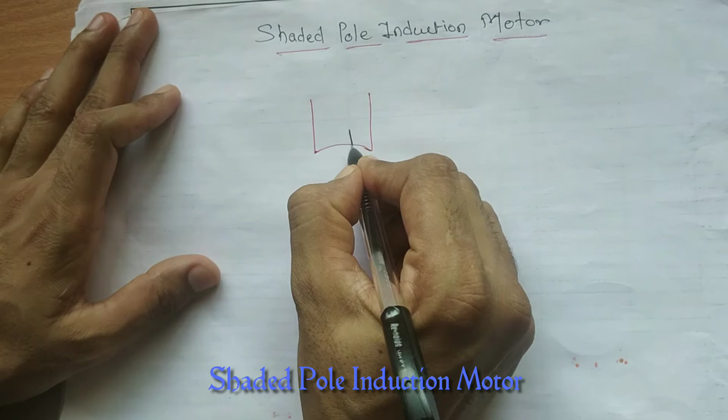Salient pole structure. Now in a shaded pole induction motor, what they have done, I'll tell you later why, but at 1/4 or 1/3 portion of this pole, they are going to cut it. They means the manufacturer. They cut it and make it like this. This is the structure of a shaded pole.

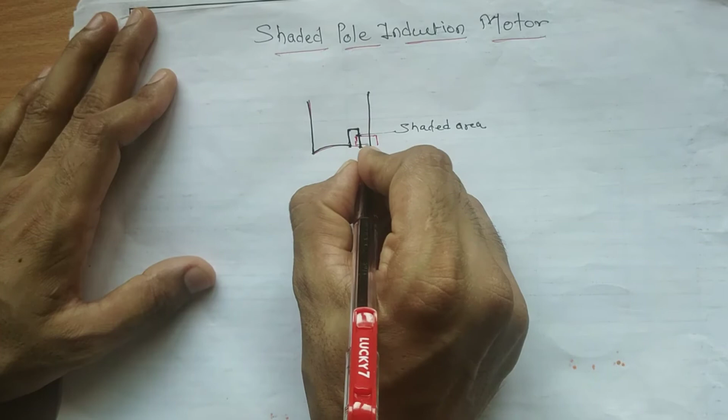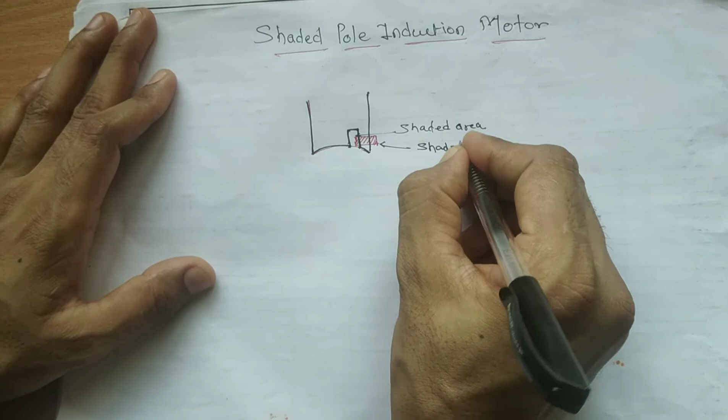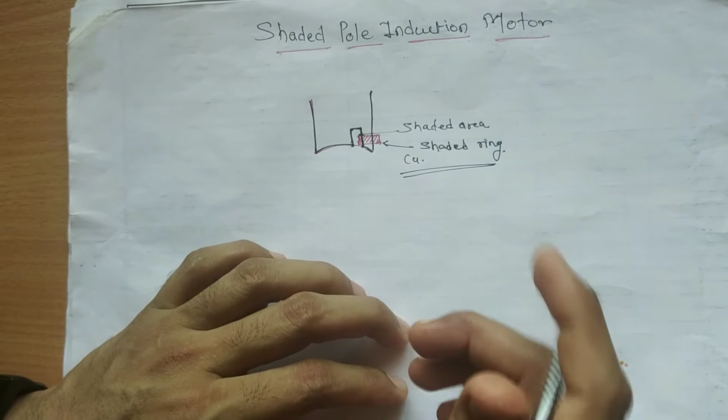Now this portion or area, they call it the shaded area or shaded portion. And what they have done, they just put inside this portion one thick copper ring. This copper ring is given a name: shaded ring, shaded copper ring, or copper shaded ring, whatever you can say. Now this ring, they fixed it over in this area.

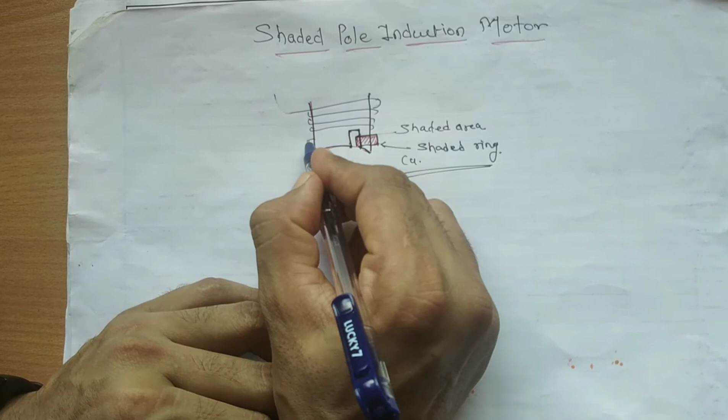Again, over this pole there is a winding. There is, you can say, a single phase winding like this. We already learned about this winding, right? Now this pole which is over the stator, everyone knows what exactly the stator is, right?

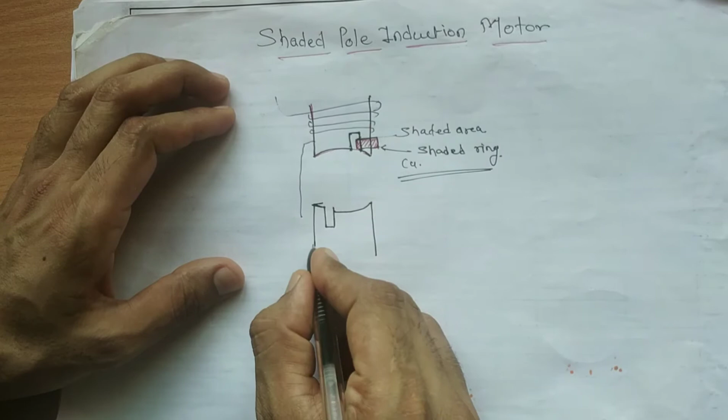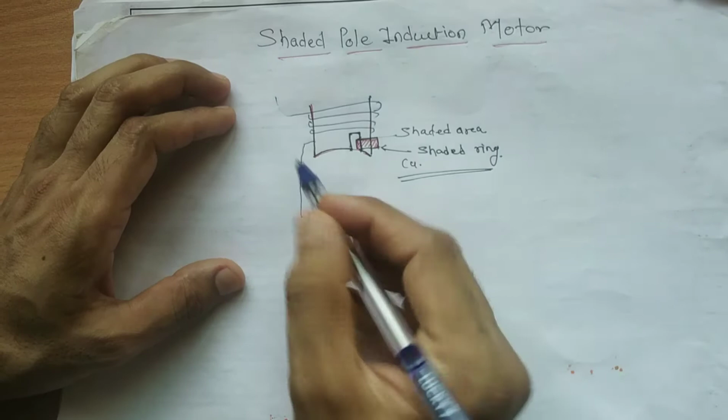And there is a second pole like this, second pole here. Okay, make it like this. Again here they put a copper shaded ring and the winding over this pole like this.

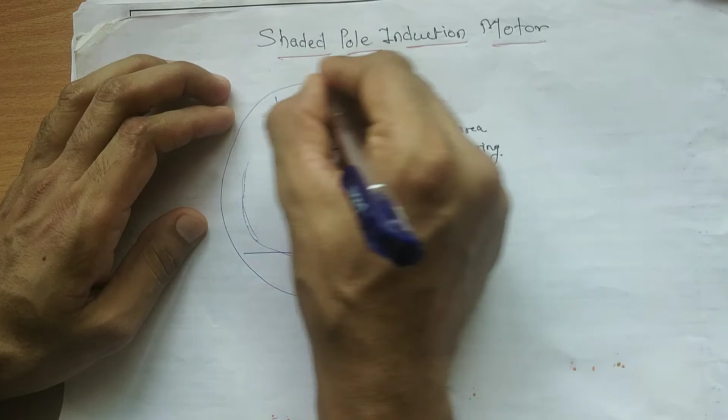Now suppose this pole you have to connect to the stator like this. You can make a circle. Now this you have to connect across the single phase AC supply, across these two terminals. And in this area what you have to fix or put? Simple, rotor. What kind of rotor? Again, squirrel cage rotor.

Now this is the constructional diagram of the shaded pole induction motor.

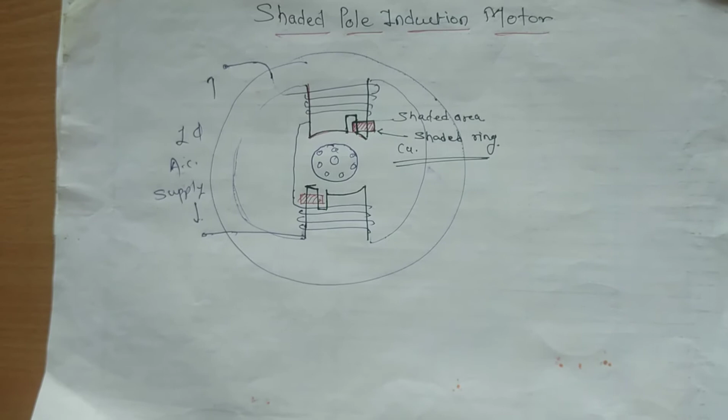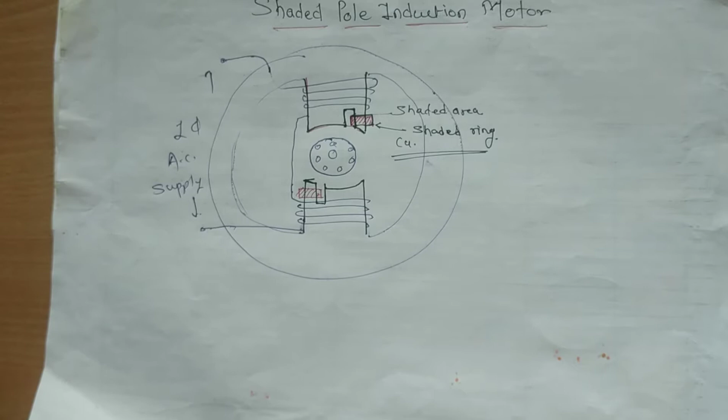See, when you are writing the construction part, in a simple way you have to write it down. First you have to write down stator pole, stator winding. When you write down stator pole, the pole is constructed as a salient pole, and what kind of material we use, which is silicon steel stamping, and which is laminated, of course.

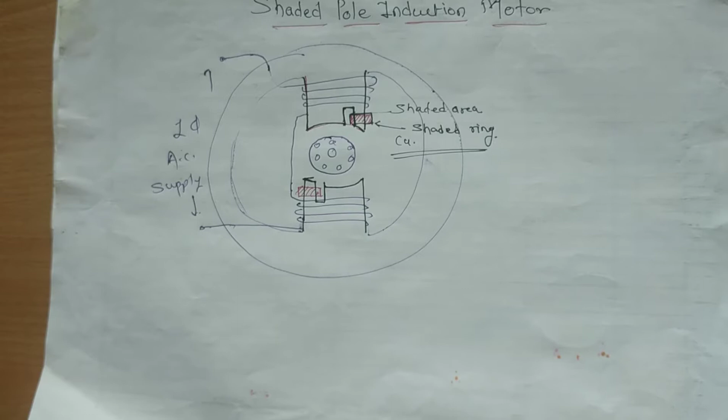Then there is a shaded area or shaded portion available over the pole, right? And next you have to write down about the shaded ring. Then in this area we fixed one thick copper ring in this shaded portion, right? So this ring we call the copper shaded ring, or only shaded ring, you can say.

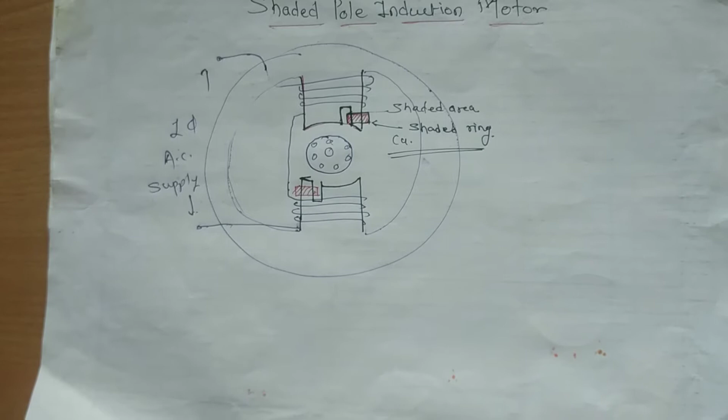Then over the pole you have to just do a winding. What type of material we are using for the winding? Which is enameled copper, which is single phase winding we have done. Then next, rotor: simple squirrel cage rotor we are using for this motor. Okay, so this is the construction part.

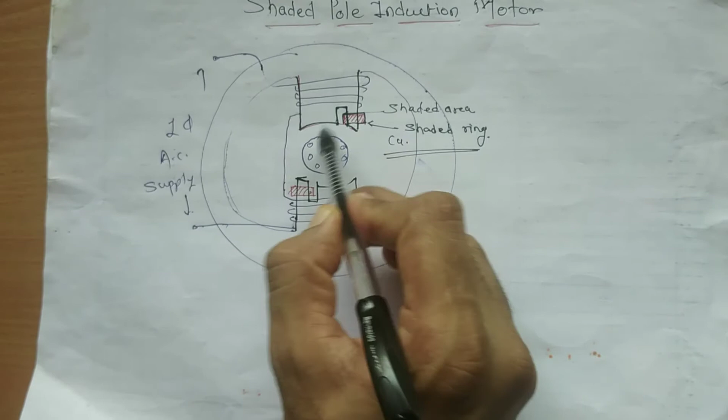See, this shaded pole, or this pole which is cut over here, the overall portion - from the overall portion, 1/3 or 1/4 portion, till 1/3 or 1/4 portion we are going to cut it, right?

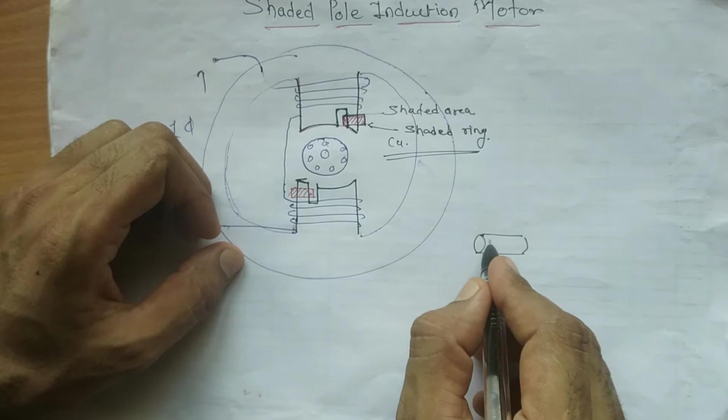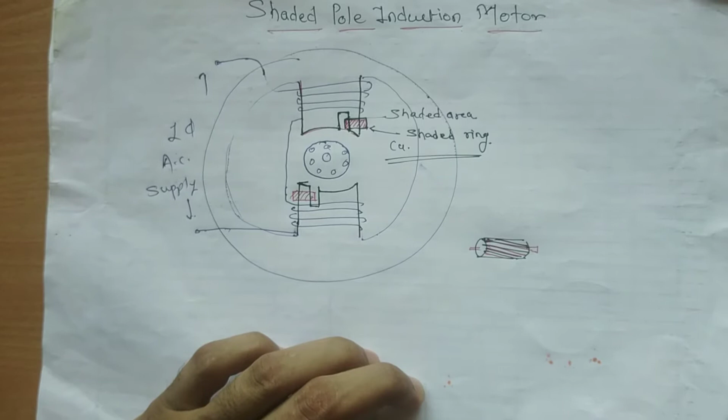This is the rotor available for the shaded pole induction motor. And the air gap between your pole and the rotor has to be maintained 0.25 to 0.5 millimeter. I am repeating again, the air gap has to be maintained from 0.25 to 0.5 millimeter. It means uniform everywhere - if you are taking 0.25, you have to make it uniform everywhere.

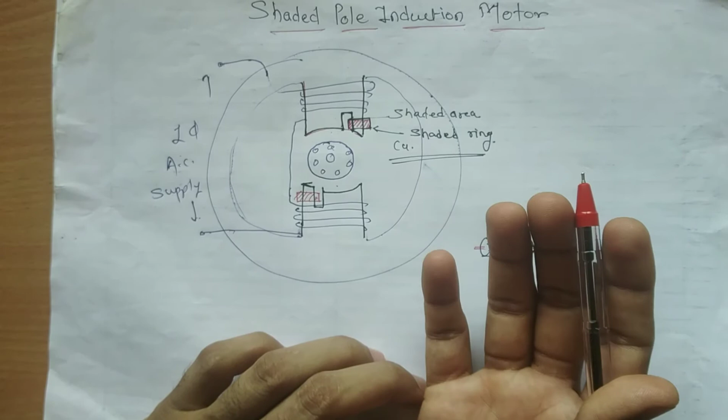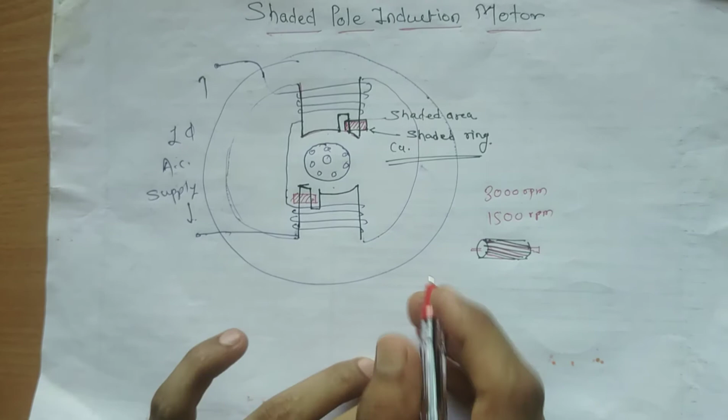So 0.25. Okay, the poles can be 2-pole or 4-pole; shaded pole induction motors are generally available as 2-pole motor and 4-pole motor. So the speed generally we get is 3000 rpm or 1500 rpm motor is available. Okay, so these are the general constructional details of this shaded pole induction motor.

Okay, let's move forward.

We'll see the working of shaded pole induction motor. Now pay attention properly how the shaded pole induction motor exactly works.

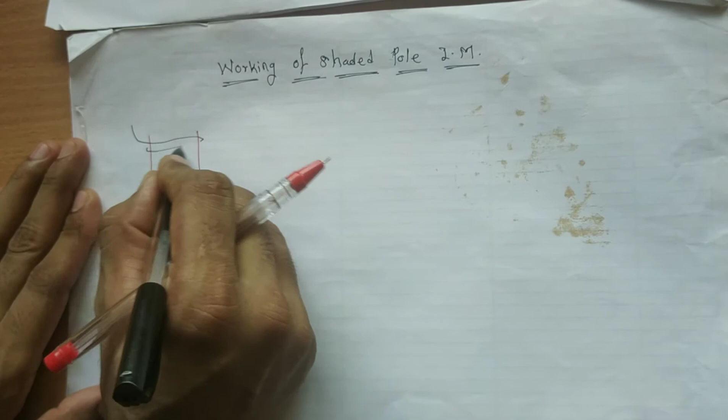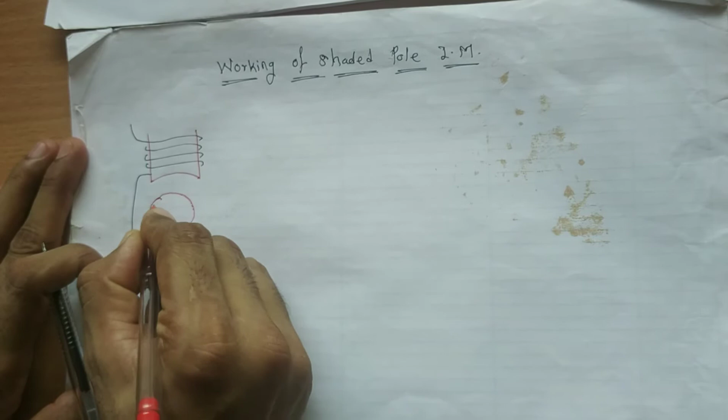See, first there was a pole like this. This pole I can draw like this. Here there was a pole, and that time we do winding over this. Everyone knows how the single phase induction motor is constructed, I'm just giving you a short brief. And there is again a rotor, one rotor, which is squirrel cage rotor.

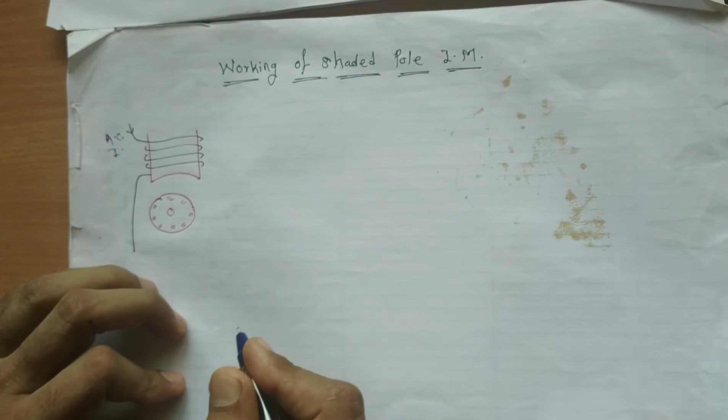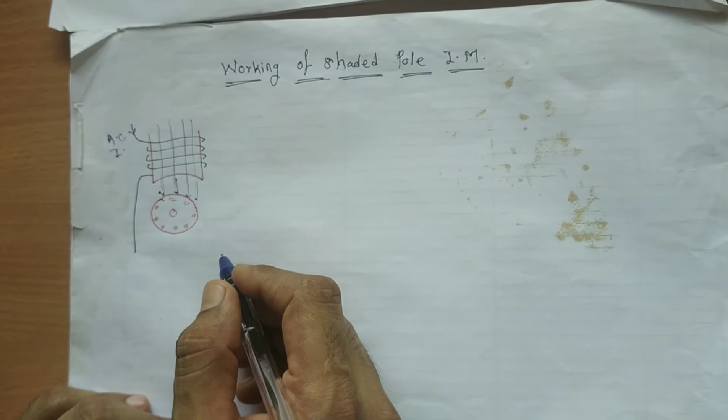Now see what happens when the current started flowing through this winding. That current is AC, alternating current, and it will produce the same nature of magnetic field, which is an alternating magnetic field in this area, evenly flowing from the surface of the pole towards the rotor. But this fluctuating or alternating magnetic field is not at all a rotating magnetic field, and that's why your single phase induction motor was not self-starting, which we have already learned.

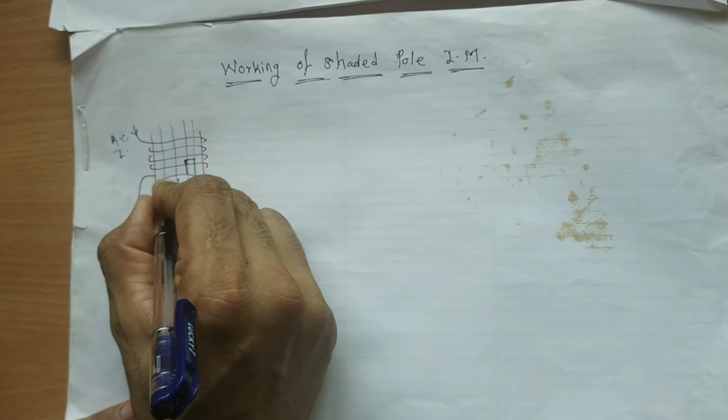But here what they have done, they just cut this portion like this. They cut here 1/3 or 1/4 portion, and they put a copper ring, you can say a copper shaded ring. Here they put a copper shaded ring.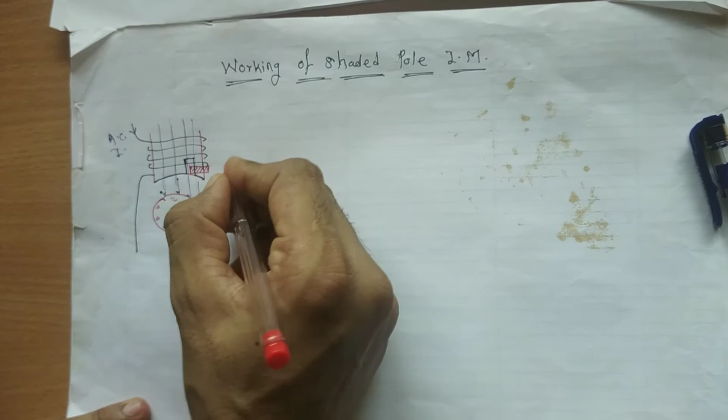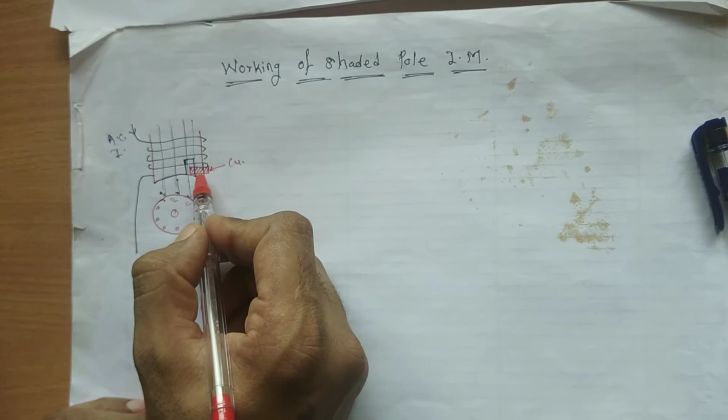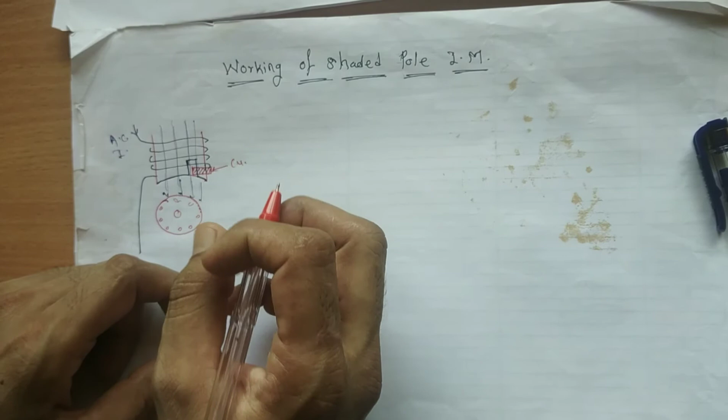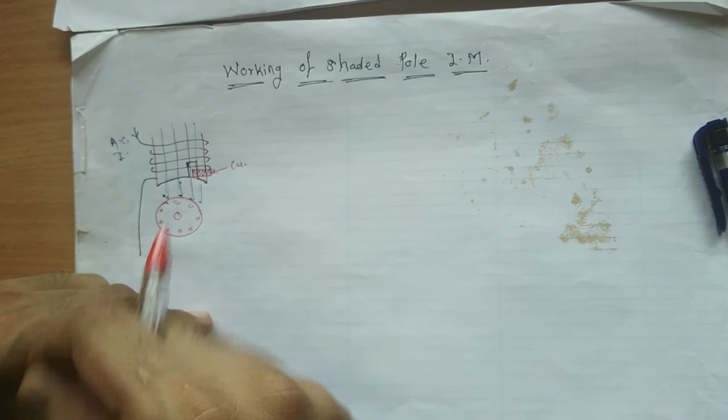And just because of that, what is happening here? Now pay attention. This ring I am putting inside the changing magnetic field. Now everyone knows Faraday's law. When we put a conductor in a changing magnetic field, it will cut that magnetic field, so an EMF will induce inside this copper ring, and current started flowing through it, which has the same nature, but by Lenz's law, has some opposing nature. Lenz's law says it will oppose the cause of its production. Now because of that, what exactly happens and how this motor works, this we will learn.

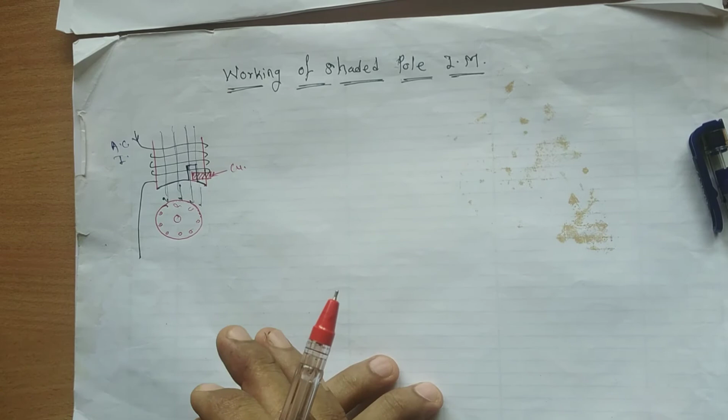Now see, next I'll tell you step by step. Three instances are there, I'll explain you. Okay, just stay with me.

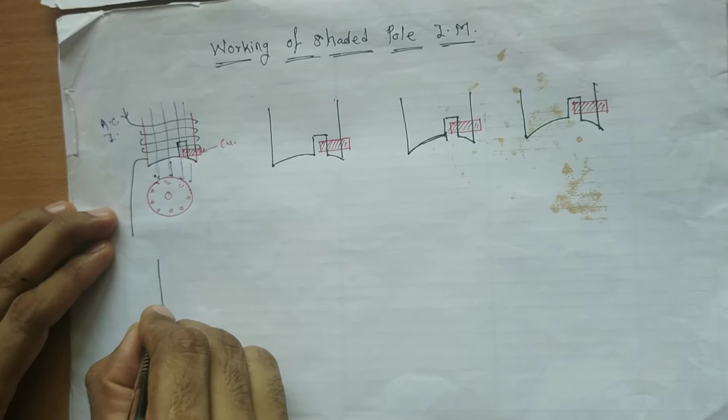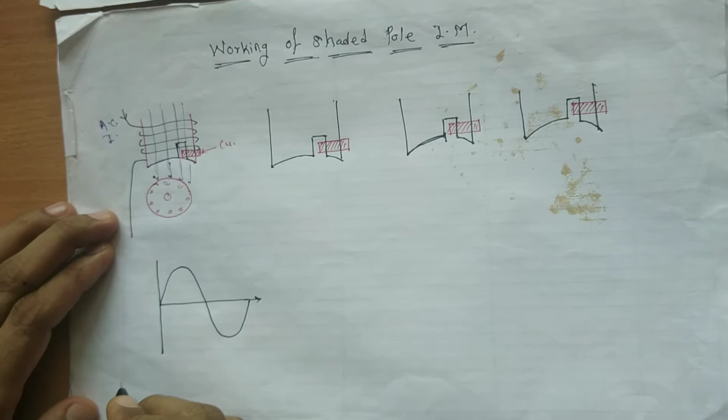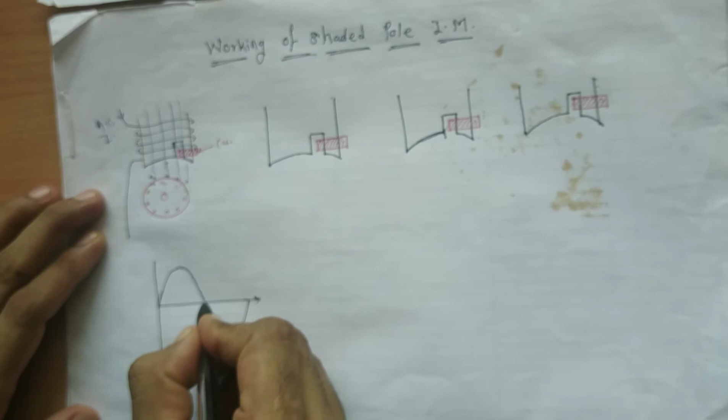Now see here, I draw some diagrams of this pole. Three diagrams I draw, and here I will again draw one AC waveform, sinusoidal waveform, everyone knows, right, alternating waveform. See, like this. Now see, this is the one cycle. There is a 50 cycles per second alternating current, but here I am just showing you one simple cycle, and will take one half cycle only to explain.

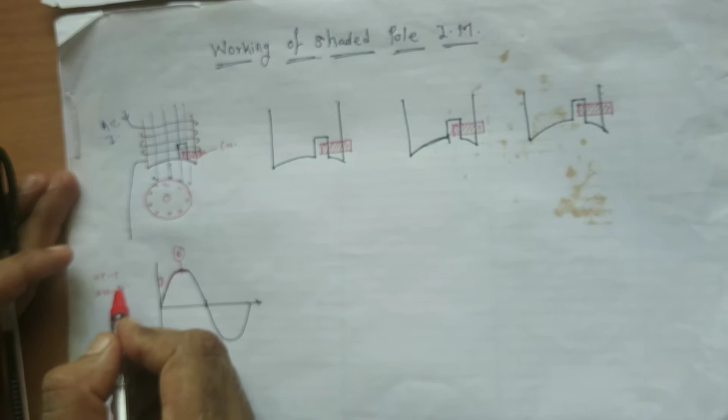Now in this half cycle again, there are three instances I can show you. There is an increasing instant, this is the increasing instant, first instant. There is a second instant, which is constant instant, or equal number of increasing quantity and equal number of decreasing quantity. You can say plus 5 minus 5, or plus 10 minus 10, so which is nothing but 0 only. Here there is a third instant, which is decreasing instant.

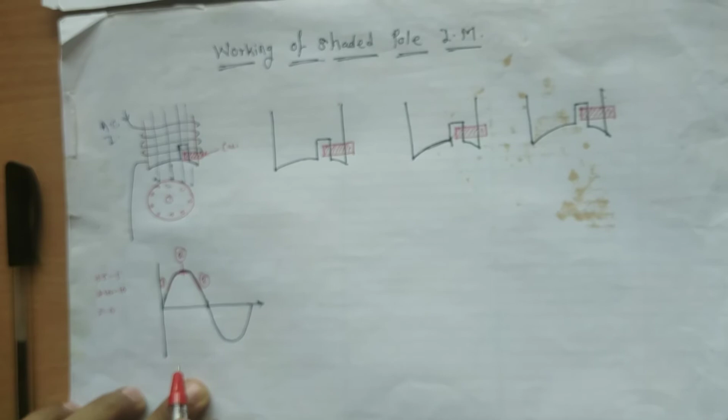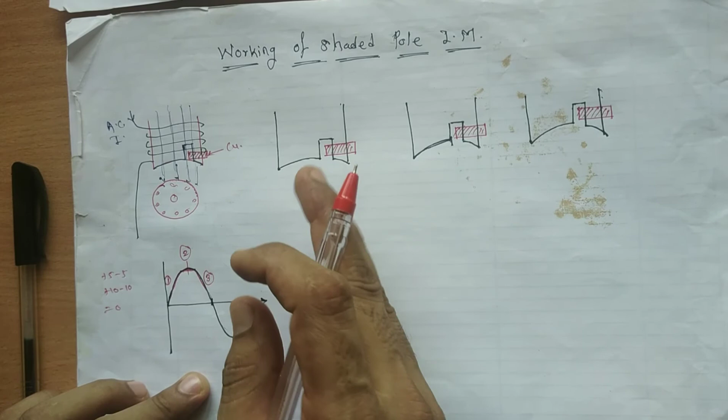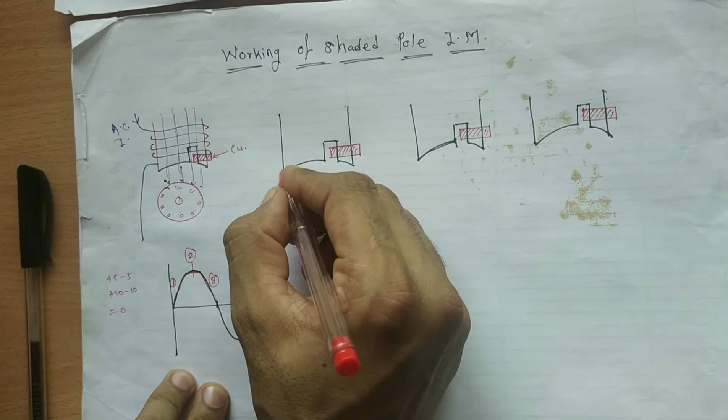Now for that purpose only, I draw here three diagrams. I will show you instant by instant, three instances, what exactly will happen. Now here at the increasing instant, again I am going to draw here half cycle like this. Half cycle here, there is again half cycle here, there is again half cycle here.

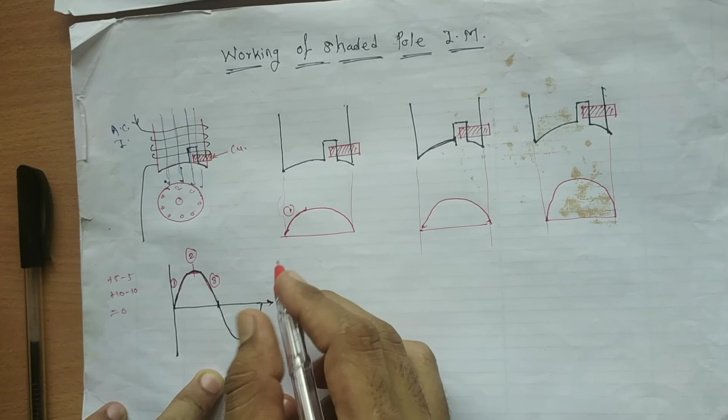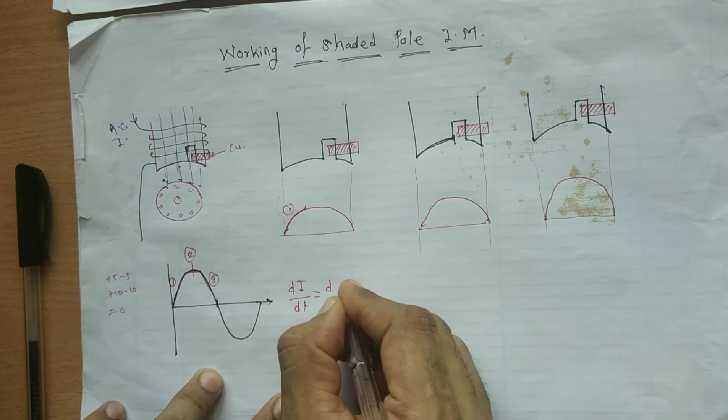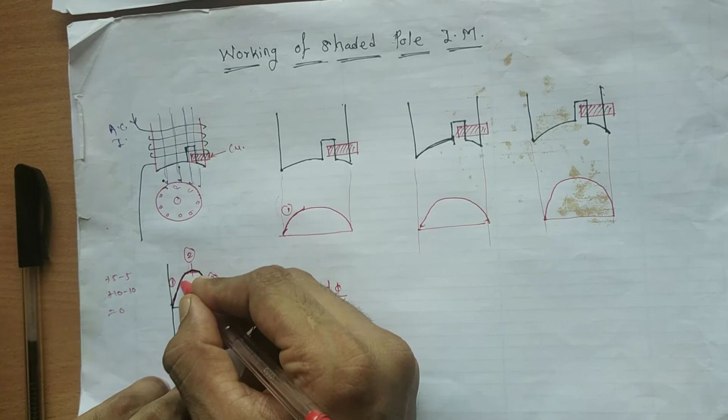Now here, see, at the first instant, there is an increasing quantity. Now this current, which is changing with respect to time, di by dt, and because current is directly proportional to flux, that's d phi by dt - your rate of change of current is nothing but rate of change of flux. Now rate of change of flux here, it is increasing. So because of that, here again I am going to show you some winding. Now because of that, the fluxes are producing over here.

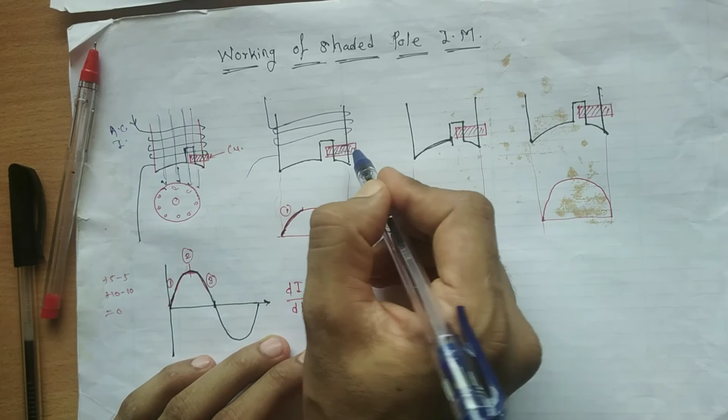See, this is what the increasing rate of change of flux. Here again, because of Faraday's law, the flux will link here and produce an EMF. Again the current starts flowing through this copper ring or shaded ring, and because of that, magnetic flux will be produced by this ring, and this will oppose its cause by Lenz's law.

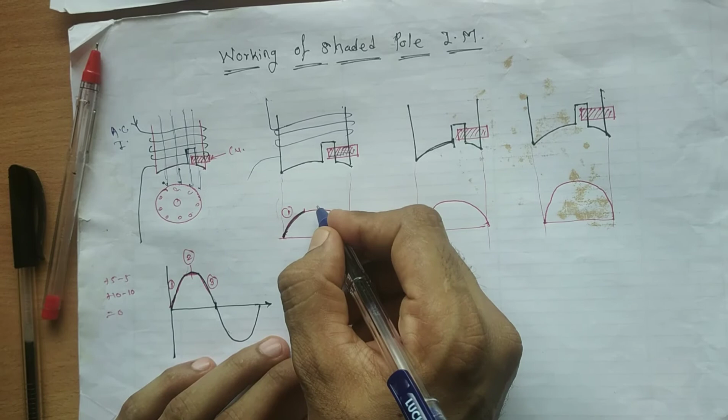What will it oppose exactly? The increasing rate of change of flux, so it will oppose this increasing rate of change of flux. It means the nature of this flux will be opposing to the main flux, it will oppose the main flux. That's why all the fluxes are going to divert.

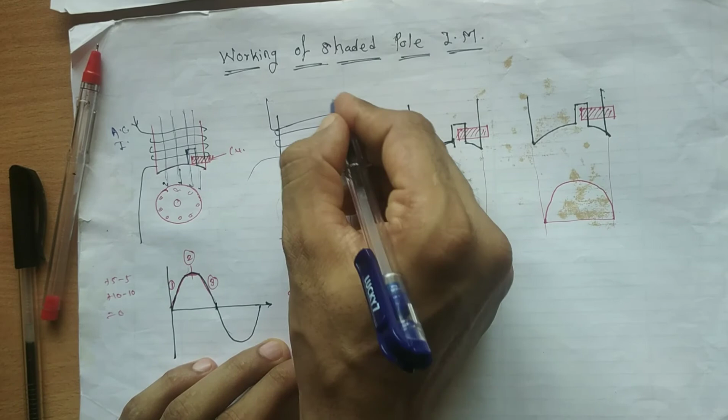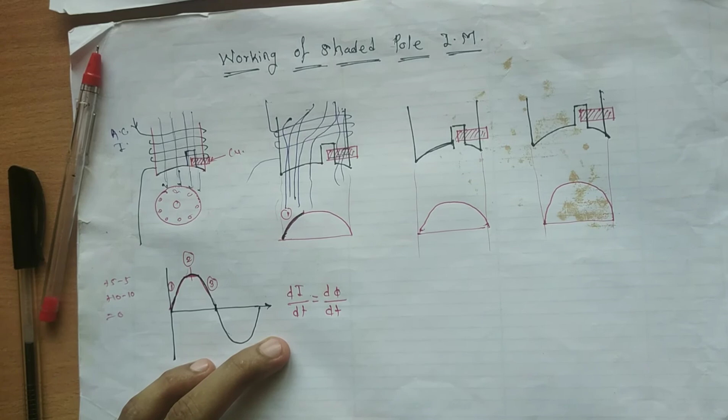The flux gets weak over here and concentrates over here, right? That's why you can say the main flux, or the resultant flux, will be concentrated here, on the left hand side portion of your pole. So this is what happened at the first instant.

Now let's talk about the second instant. In the second instant, again suppose there is a winding like this. This is the winding.

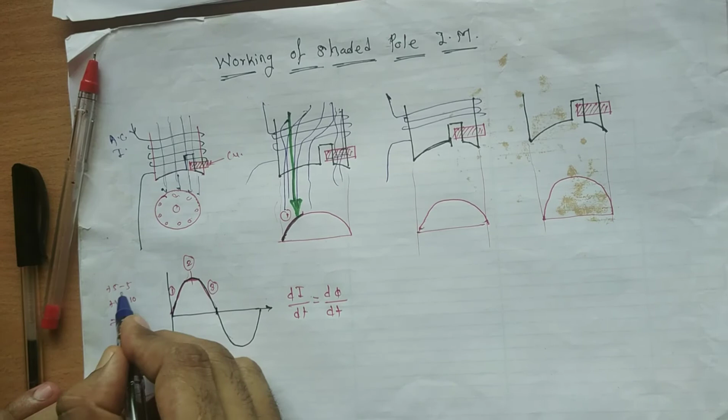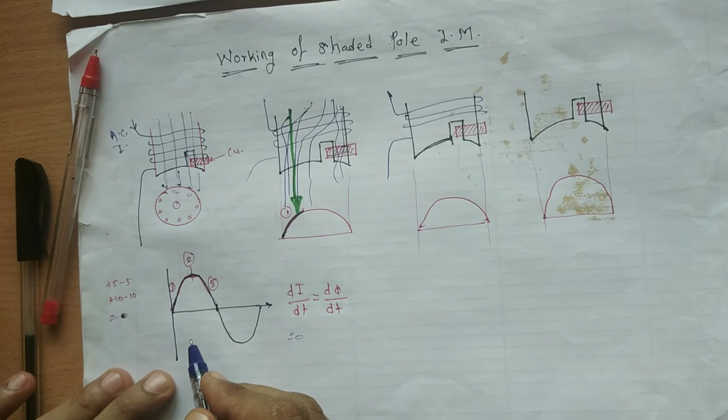Again at the second instant, let me tell you what is happening. There are equal number of increasing and decreasing quantities, which means the rate of change of flux is zero at this second instant. It means nothing is happening.

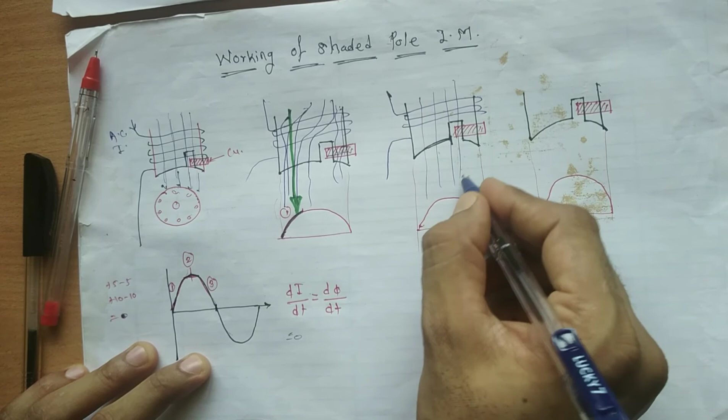At that time this will happen: the fluxes start flowing uniformly through this pole. If you solve the resultant component, then the resultant component will be at the center. This was at the left hand side (LHS), and now this is at the center.

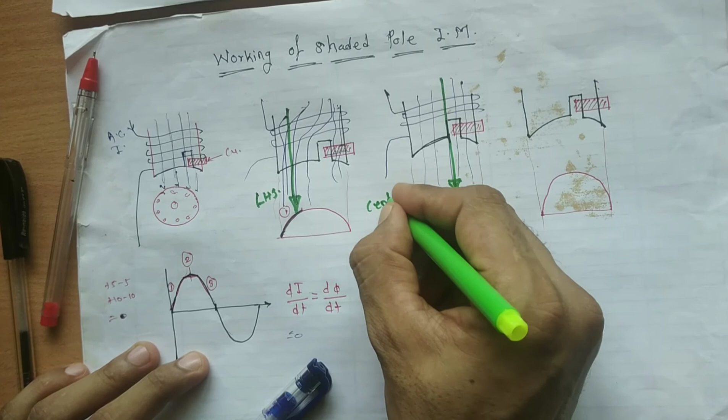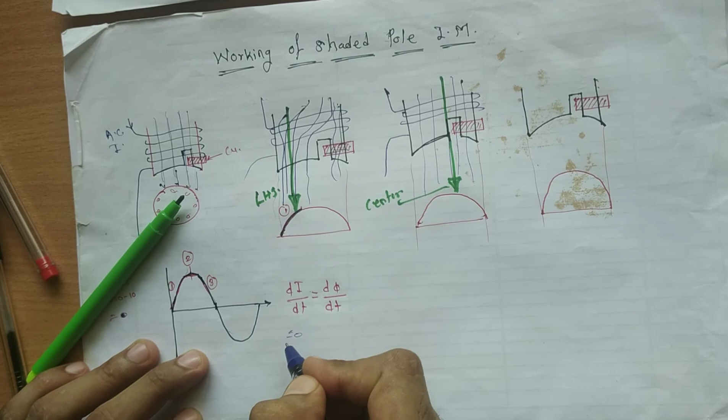Next, third instant. What will happen at the third instant? There is a decreasing quantity, a decreasing rate of change of flux. From here to here, it is decreasing rate of change of flux.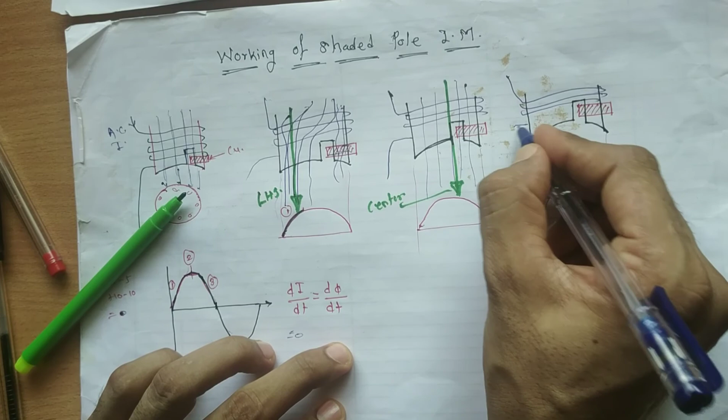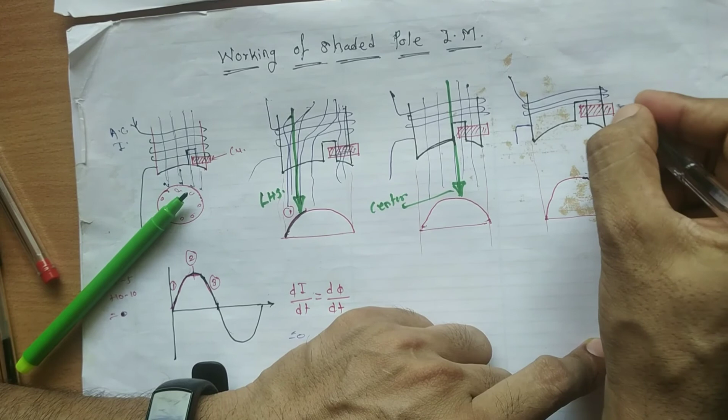Because of that, what is happening? Again, it will oppose whatever flux is produced here in this shaded ring. This will oppose its cause. Now what is the cause? There is a decreasing quantity, a decreasing rate of change of flux. Now it will oppose it, meaning it will want to increase it.

It means all the fluxes are going to concentrate over here. It will produce a lot of flux and the fluxes weaken over here. That's why the main flux, or resultant flux, will be concentrated here.

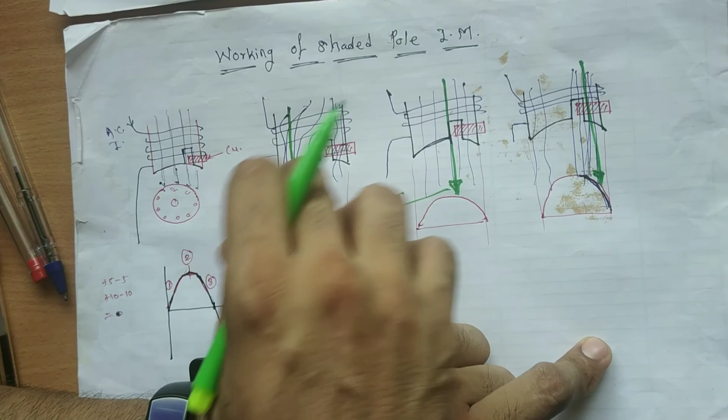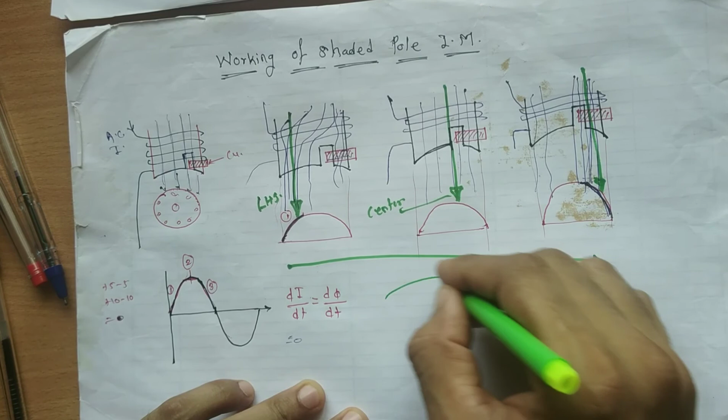If you see from diagrams 1, 2, 3, the flux is actually moving from left to right, or you can say clockwise. You can directly conclude the flux is now moving from unshaded portion to shaded portion.

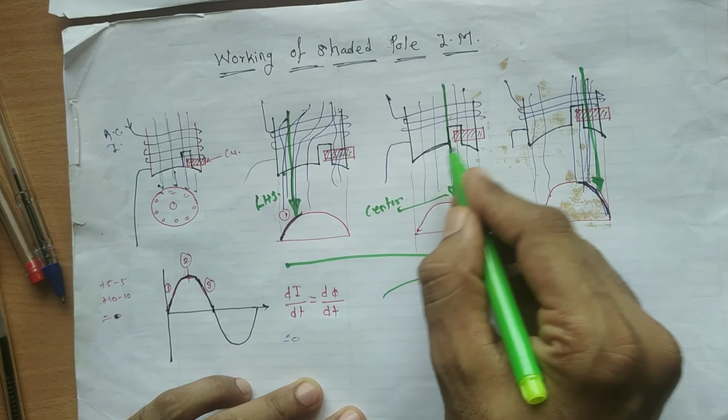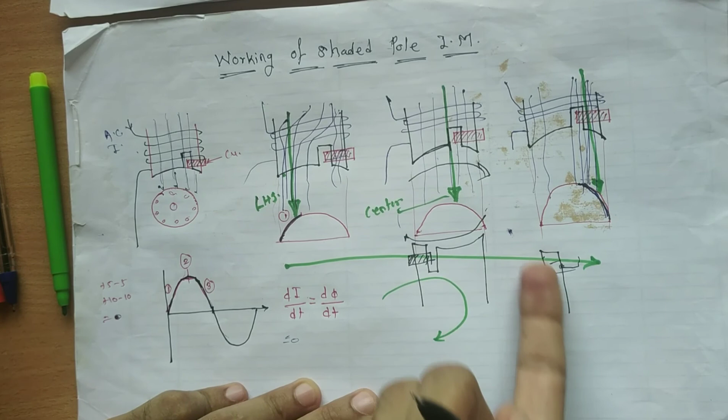If I draw a second pole here like this, with a shaded ring here, then again it moves from unshaded portion to shaded portion. This is how the rotating flux is produced, and this is how the rotating magnetic field, or rotating torque, is produced.

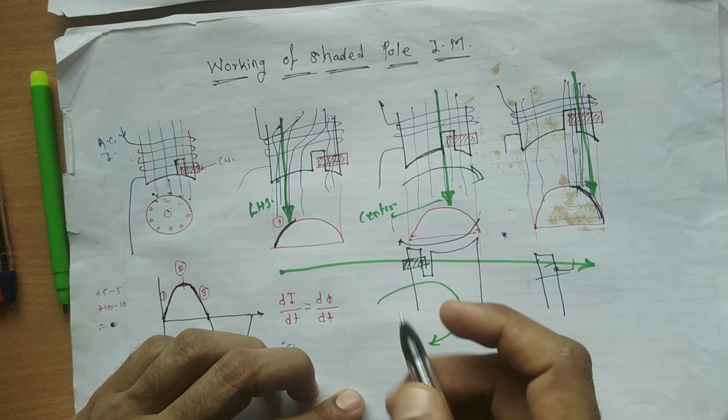First you get the moment at the start, movement to your rotor, and the rotor starts rotating because of the rotating magnetic field or rotating torque that is produced. So this is how the shaded pole induction motor works.

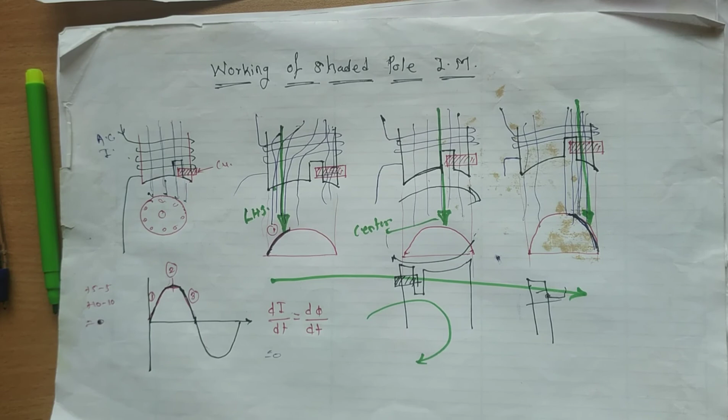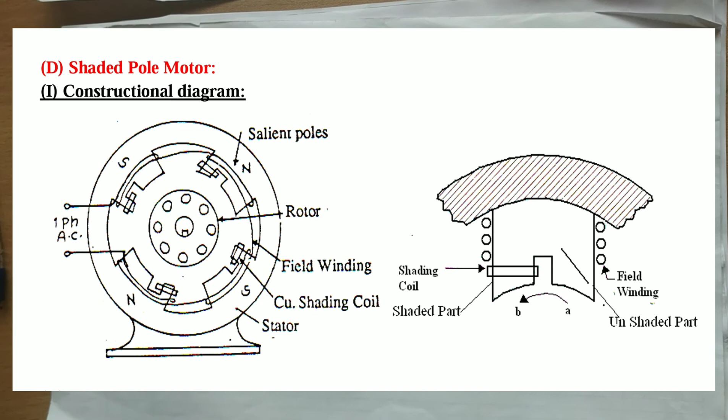Applications of this motor: it is used for air heaters, hair dryers, toys, hair trimmers. In such types of applications we use this motor.

This motor actually uses up to 40 watts and it is a low cost motor. We make it a small size motor, and the construction of this motor is very rigid.

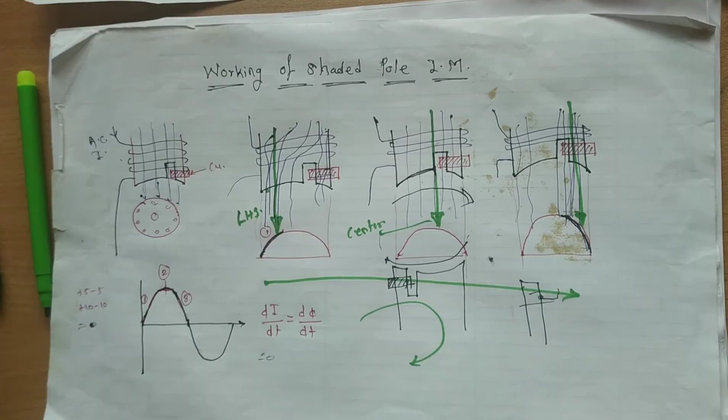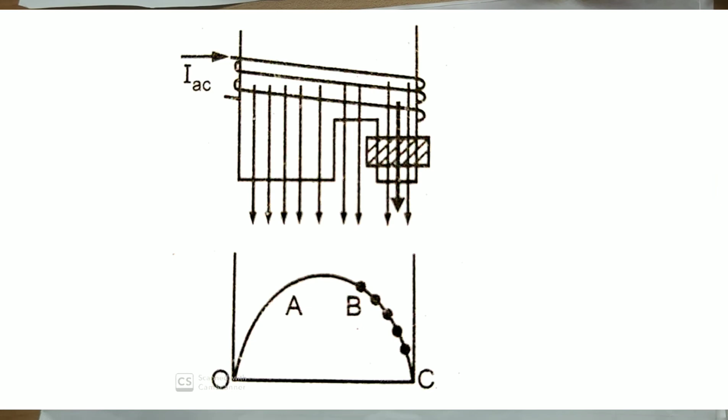The starting current of this motor is a little bit more than the running current. That's why we don't have to use any starters or extra protective devices for this motor. Because of that, we can use it where there is a blocked rotor, or the rotor can stop in the middle. For that application we can use such motors, or shaded pole induction motor.